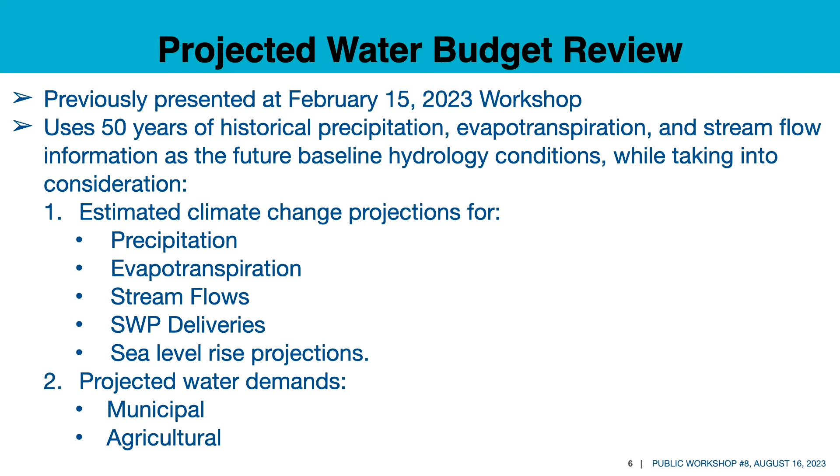The current water budget is essentially right now, so we picked a small subset of that historical budget to represent the current conditions. And then there's the 50-year planning horizon that starts from the date of adoption of the GSP, which is going to be January of 2024, and then going out 50 years through the end of 2073.

And so again, as I was describing, what we do to create this planning horizon is we take 50 years of historical data, and then we make adjustments, or perturb it in the nomenclature of DWR, to take into account the effects of climate change. So our baseline condition that we used for projecting 50 years into the future is the historical period of 1953 through 2002.

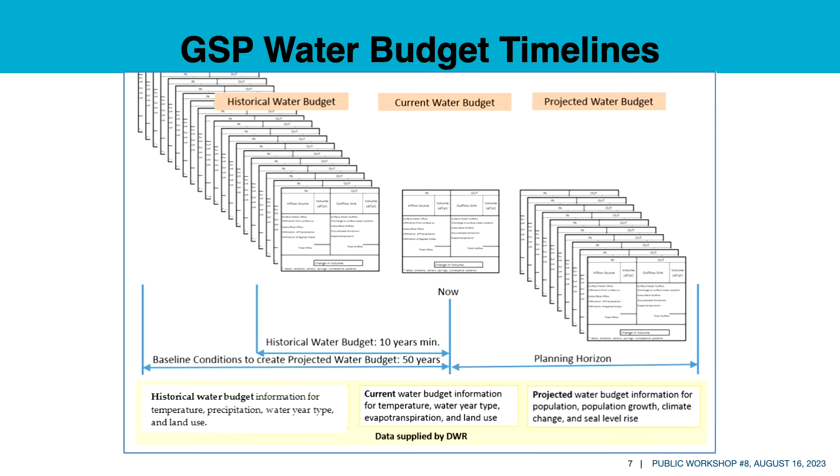So DWR has provided monthly climate change data sets, or what they call change factors, for these aspects of the water budget and the hydrology of the basin. So we have monthly change factors for that historical period. For precipitation, it's expected that as the climate warms, we'll actually see a little bit more precipitation in the basin than we saw historically.

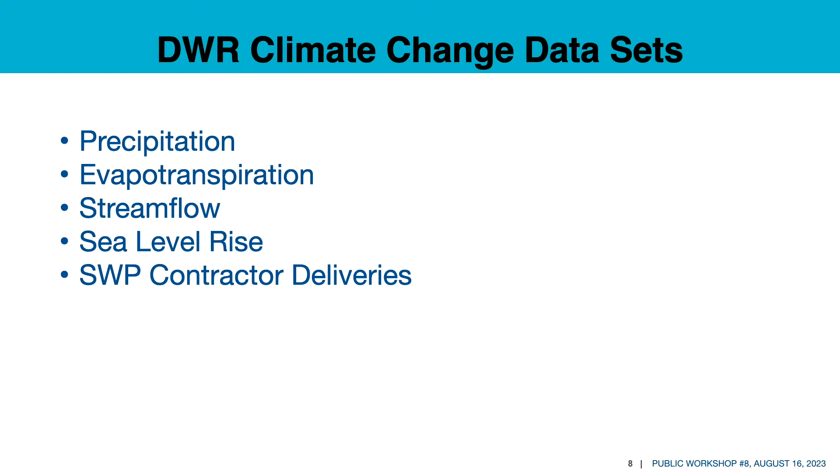And of course, as things heat up, we've got more evapotranspiration, both from native vegetation as well as crops in the basin. Stream flow, of course, if we've got precipitation increasing, we have a relatively commensurate increase in stream flow. Sea level rise, the predictions are about 6 inches of sea level rise between now and 2030, and about 18 inches between now and 2070. So we've incorporated the rising sea level in the groundwater model.

DWR also provides change factors for state water project deliveries, and that really is essentially inconsequential for this basin. It didn't make any change because you guys don't use a whole lot of state water project water anyway.

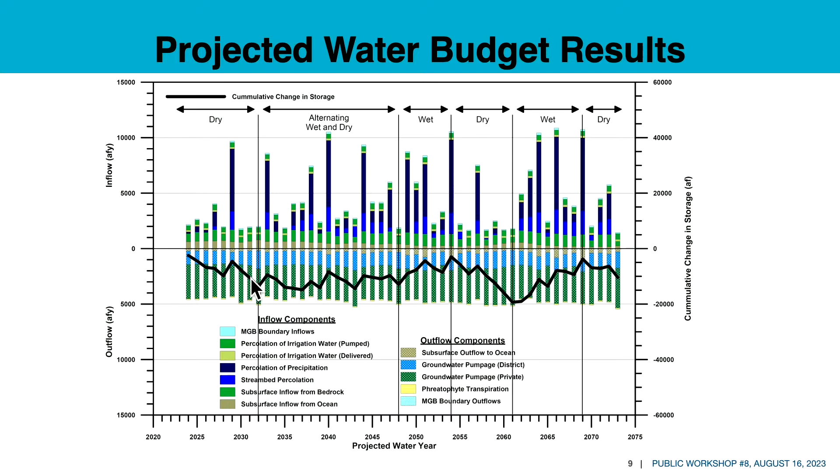So we used that projected water budget and we created a groundwater model scenario that incorporates it using the calibrated groundwater model that I discussed, I think it might have been back in November now. So we have a groundwater model of the basin. It was calibrated to the historical period of 1985 through 2020. And then we took that calibrated model and created this projected future scenario.

And we used that projected future scenario to run a variety of simulations of CAPP to see how we can operate CAPP in a way that's technically feasible, and I'll talk about what the criteria for technical feasibility are, and then to assess what the impacts of that eventual technically feasible project might be on the basin, assuming this projected future actually occurs.

So at the last meeting in May, Bob spent a fair amount of time talking about the CAPP project. He gave you a lot of details about the CAP project. So here I just want to hit some of the highlights of it. I'm not going to go over all of that stuff. But basically this is a recycled water project.

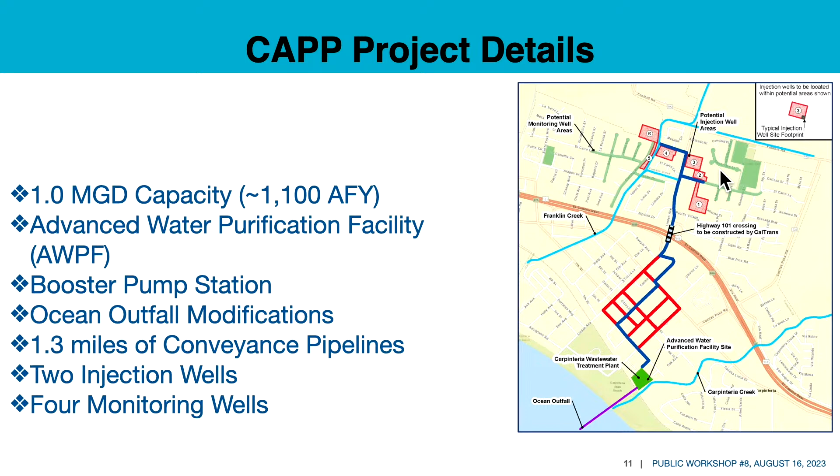And then there is a series of monitoring wells that are associated with that CAPP project that are required by the various regulators that have oversight responsibilities for a recycled water injection project.

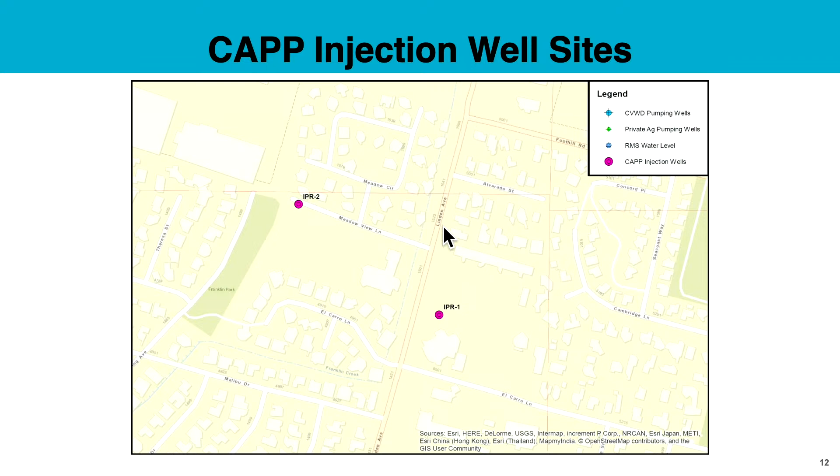And each well is injecting at a rate of about 350 gallons a minute, or a half MGD, so the 2 wells combined are injecting the 1 MGD output from the AWPF.

So as I mentioned, we've used the model in this scenario to evaluate a few different types of project operational scenarios, which I'll be discussing here in the next few slides. The first is a so-called injection-only scenario. The second is a simultaneous, quote-unquote, put-and-take scenario. And then the third is this water level management scenario. So I'm going to talk about each of those over the next few slides.

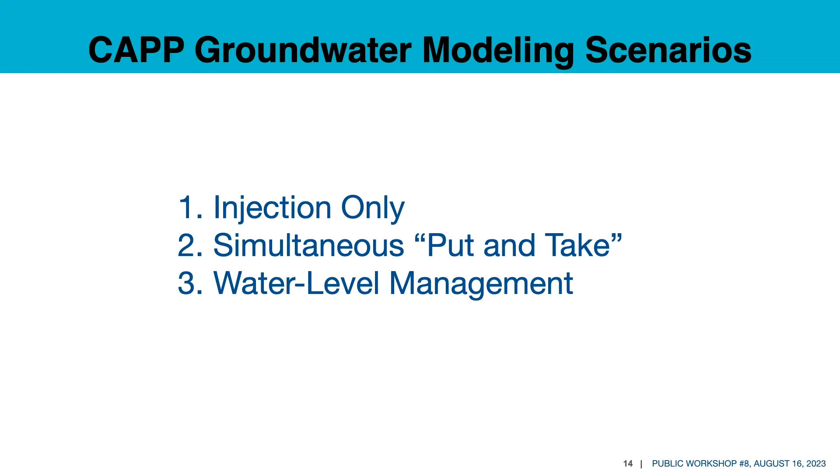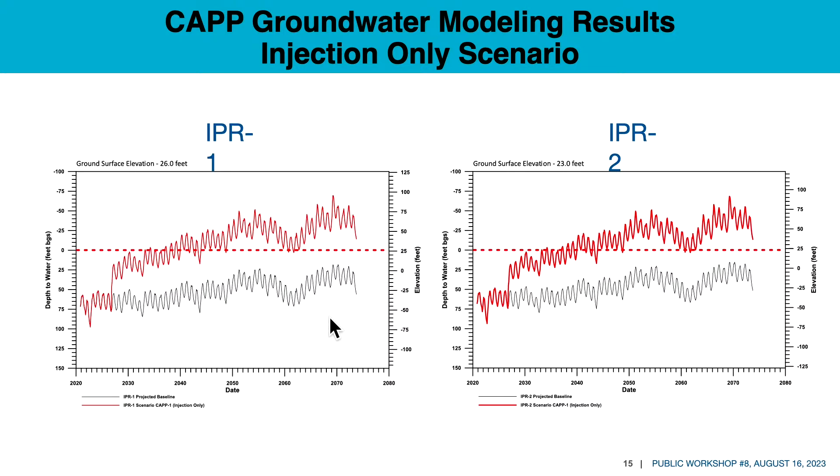We can't have water levels in the aquifer system at these injection well sites exceeding the ground surface for a variety of reasons, but the principal reasons are that there's the potential for groundwater basically daylighting at the ground surface, creating artesian conditions, which in addition to just creating a nuisance, wet water on the ground everywhere, also represents a significant potential for loss of water from the basin, right? If it's squirting out at the ground surface and running down the creeks or being evaporated, we're losing water.

So one of the principal technical feasibility criteria for this injection well project is maintaining water levels at these injection well sites at or below ground surface at all times.

So that took us to the next type of simulation, which we're calling simultaneous put and take. So in this scenario, we kept the injection rates at the same rates as the previous injection-only scenario, but then we increased the pumping of the district's headquarters and El Carro wells by a half MGD each. So we left their baseline pumping alone and we just pumped them harder. So basically, as we're injecting a combined 1 MGD at these two injection wells, we're pulling an extra 1 MGD out between the two districts' wells.

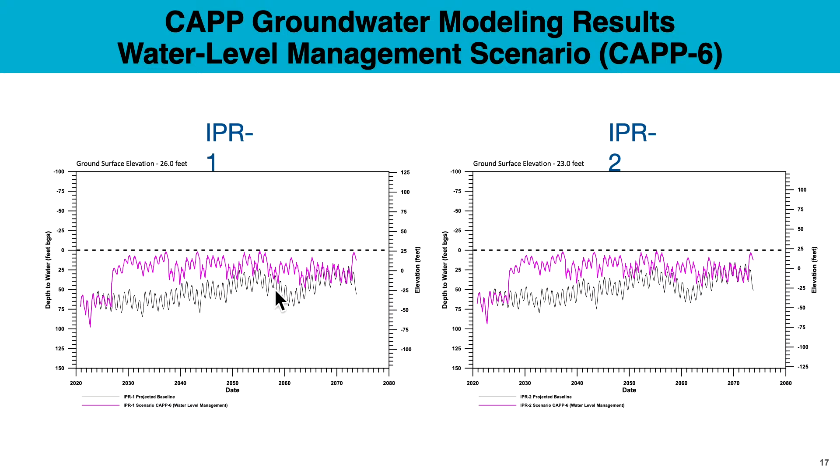Yeah. That's right. So this period here around the projected 2050s, early 2060s, where we see water levels going down, that corresponds to the historical period that we're assuming is going to happen again. So that's what this dip is, those hydrologic conditions that we saw in 1987 through 1990 or so.

Yes, sir. Does that consider that wells in the surrounding areas have been pumping a lot more now than they were back in the 50s and 60s? Yes. So for the 50-year projected scenario, the only data that we're using from the 50-year past is hydrology, precipitation, ET, stream flow, etc. The pumping that we used in this scenario is projected pumping by the district. So we used the district's urban water management plan, how much they plan on pumping the basin.

So the district's plans for pumping the basin in the future are very different than how they've pumped in the past. And we've used similar assumptions about projected agricultural pumping, which is essentially that ag pumping is not going to change much moving ahead, at least in the long-term average. We do have in this scenario a slight overall increase in agricultural pumping caused by the increase in evapotranspiration, which increases the demands of the plants, so you've got to pump a little more to overcome the soil moisture deficiencies that the extra ET creates.

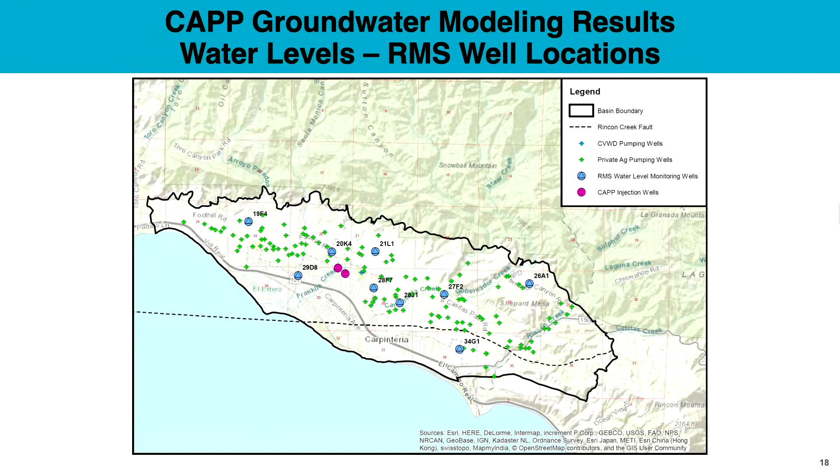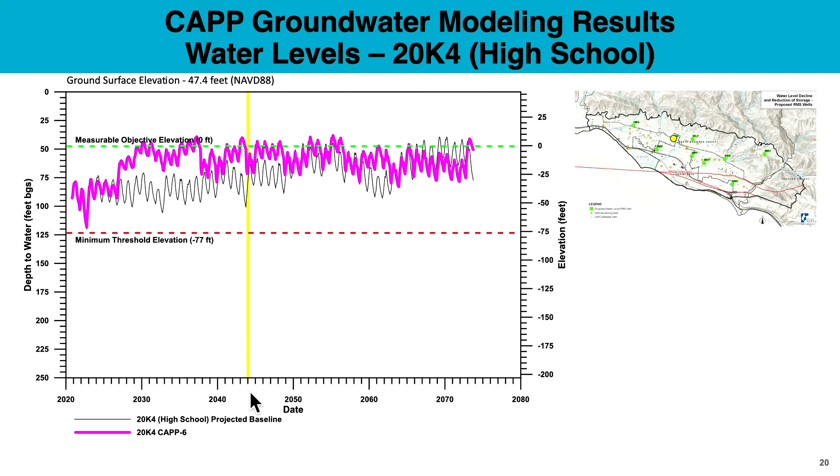So again, just moving around the basin here, a little further northeast of the high school well, 21L1, and we see a similar pattern here. Meeting the minimum thresholds, we see a water level benefit. We don't quite get to measurable objectives at this location.

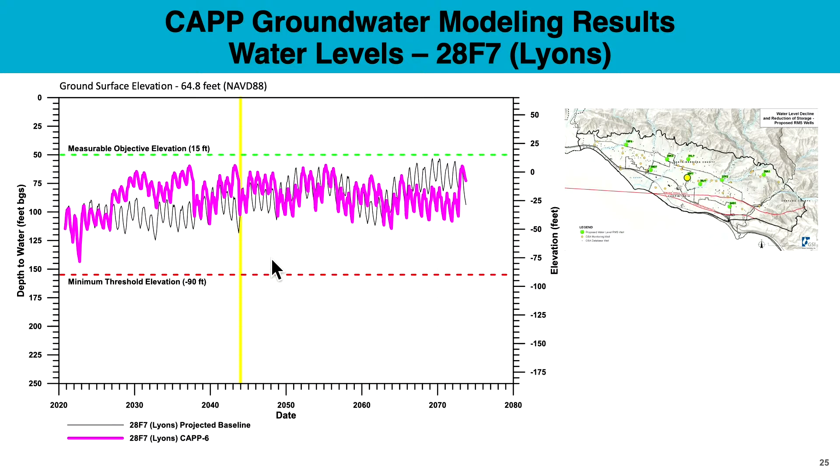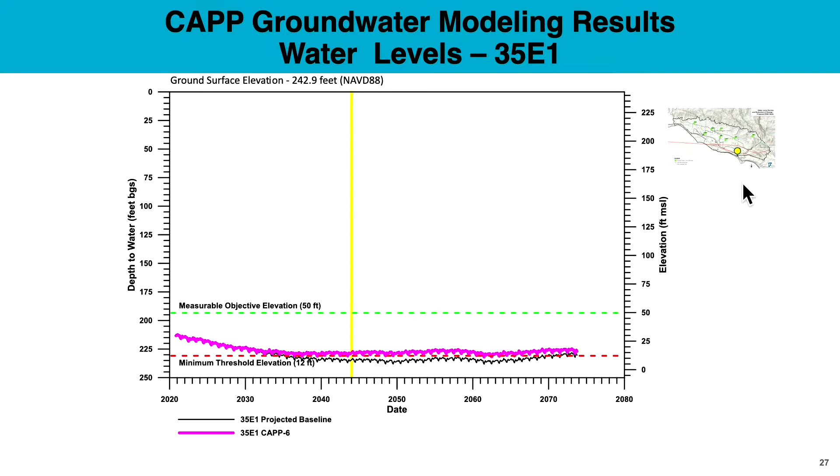These are all privately owned wells that we've got an agreement with the owner to monitor. Of these 9 RMS wells, or representative monitoring site wells, that I've shown you, the only one that's an active district pumping well was the headquarters well. All the others are existing agricultural wells that may or may not even be pumped.

So that's the water level impacts at the RMS wells that are in the GSP. We need to show that we're able to meet the minimum thresholds by 2044. But as we've talked about many times about this GSP, one of the main concerns in this basin is the potential for seawater intrusion. So now I'm going to talk a little bit about what the water level impacts at the coast are with and without the CAPP project.

Now, none of the hydrographs and the water levels that I'm going to show you have had minimum thresholds established for them, so we're not talking about hitting MTs at these next several wells, but it's incredibly relevant to what the implementation plan is going to look like, and where we're going to go from here with this GSP.

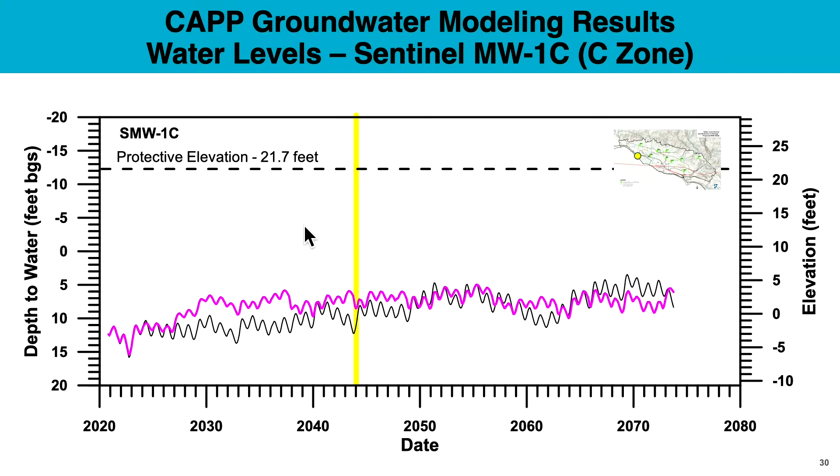And this is the C zone, similar story to the B zone. The CAPP project does provide some benefits. It does slow the rate of seawater intrusion, which I'll talk about more in a moment. But because this well is around 900 to 1,000 feet deep, we've got to get water levels pretty high, almost 22 feet elevation. Again, we've got a ways to go at this location. Now I'm going to look at water levels at the coast in a slightly different manner.

The next 3 slides. Hey Robert, before you move on. Yes, sir. I just want to make it clear that these protective elevations are based on an approach and some assumptions about the geology between the ocean and the basin, and we plan to continue to study it to refine that. We basically had to come up with a number, took a basic approach, made some assumptions. You might ask yourself, on the C zone that's about 12 feet above the ground surface at the sentinel well.

So does that mean essentially water is bubbling out of the well? And certainly if you got this level, that's what would be happening. You have to pressurize those casings. And so again, we're looking at it very broadly at this point. And when we get into the management actions, we'll talk a little bit about some of the steps we'll take in between getting those water levels to those elevations, just to verify that our assumptions are correct.

Yeah, there are a lot of uncertainties associated with the relationship of the basin and the ocean, in particular in this deeper zone. There's just not a whole lot of information about what the hydraulic conductivity of the sands in those zones are, a variety of other things. So Dave will talk when I'm done here. He'll talk a little bit about the types of studies and things that are going to be put into the implementation plan for the GSP to get at this issue.

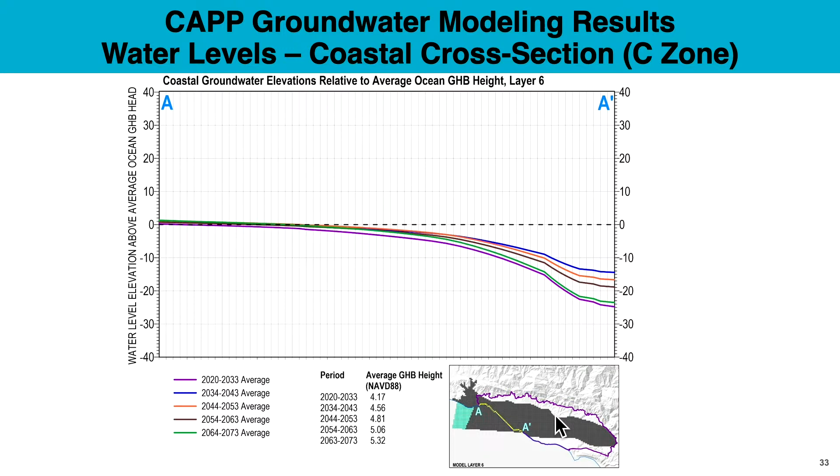So a lot of work is going to need to happen to get a better handle on understanding exactly what's going on in this area of the basin, and then also developing a plan to do something about it. So that's it for the water level impacts.

Now I'm going to move to the water budget impacts. So how does CAPP affect the accounting of inflows minus outflows, change in storage? So this is the same graphic I showed you 20 minutes ago, 30 minutes ago at the beginning for the no project scenario. It's the exact same graphic, just with the CAP project added to it.

So on the inflow side, in purple here, sort of pushing all these bars up by the same amount, 1,100 acre-feet a year of injection. And then recovery on the bottom part of the graphic here. And then again, the black line is the cumulative change in storage, or the difference between inflows and outflows each year, cumulatively, year to year to year.

And not unlike the no project scenario, this cumulative change in storage curve is relatively flat, but we do see at the end of the 50-year run a relatively modest deficit of about 10,000 acre-feet.

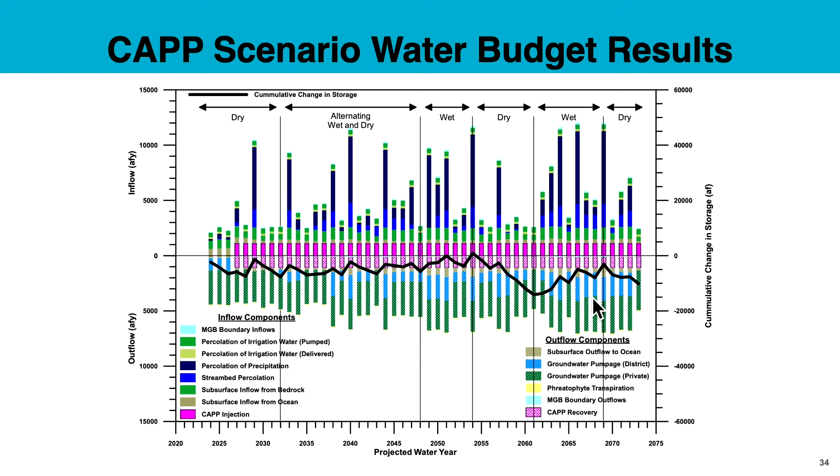So here's a table that puts numbers to what I was showing you graphically. And what this table is, it's a comparison of the no project baseline and the CAPP Scenario 6 project, summarizing the average annual volumes over that 50-year period for each component

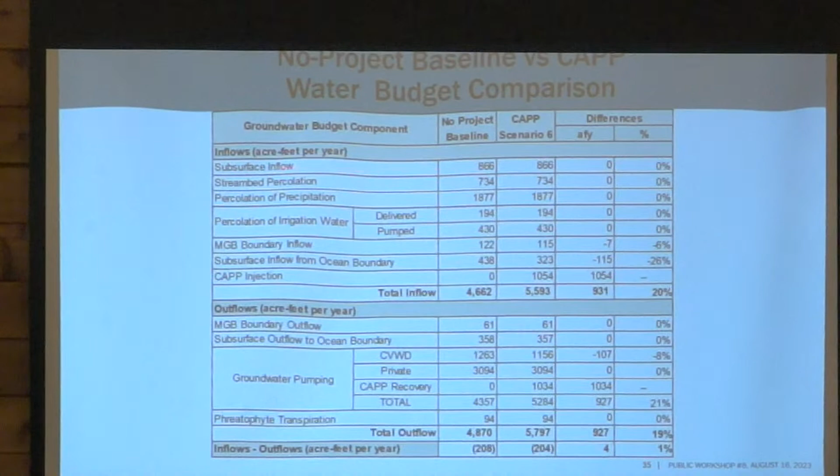of the water budget. So we have inflows, we have subsurface inflow, stream bed percolation, percolation of precipitation, percolation of irrigation water, inflow from the Montecito basin across the boundary, and I'm going to come back to this, subsurface inflow across the boundary. So this is the model simulated amount of water that's coming from the ocean side of the boundary into the basin. And then on the outflow side, we have relatively minor boundary flows. By far the largest source of outflow in the basin is pumping.

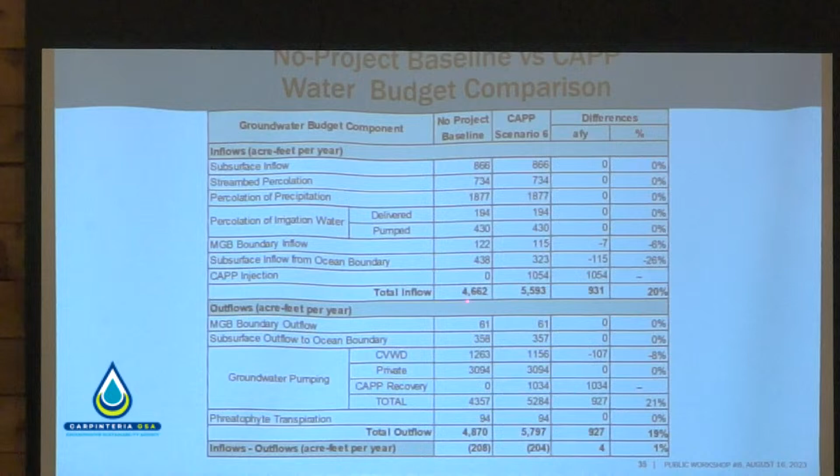So starting with the no project baseline, over that 50-year period, we have an average annual amount of inflow of about 4,700 acre-feet a year, roughly. I'll call it 4,670 for this discussion. And then an outflow of 4,870 acre-feet a year, which results in a slight deficit, or slightly more outflow than inflow, of about 200 acre-feet a year on average.

So going back to what I said on the previous slide, at the end of that 50-year period, we have a cumulative deficit of 10,000 acre-feet. 200 times 50 years, that's how you get the 10,000. Now with the CAP project, same components. There aren't many differences in percolation of precipitation, subsurface inflow, those parts of the inflow, which you would expect, right? I mean, the CAP project's not going to have an effect on rainfall or precipitation.

I'll come back to subsurface inflow from the ocean boundary here in a moment, but basically we've added to the inflow side of the equation the CAPP injection. Now over that 50-year period, it averages out to about 1,050 acre-feet a year. You've heard me and Bob talking about 1,100 acre-feet a year, and you might ask, well, why isn't it 1,100? It's because the project's not going to start until 2027, but the 50-year period starts in 2024. So over that 50-year period, there are a couple, 3 years there where CAP's not running. So that's why that average number is what it is.

So with the CAP project, we now have a total amount of inflow of about 5,600 acre-feet a year. A little bit of a difference in district pumping because, as I was describing earlier, we were able to back off a little bit on the district pumping of native groundwater. So we have a little bit less pumping of native groundwater by the district under the CAP scenario. And then we're basically recovering all of the CAP water.

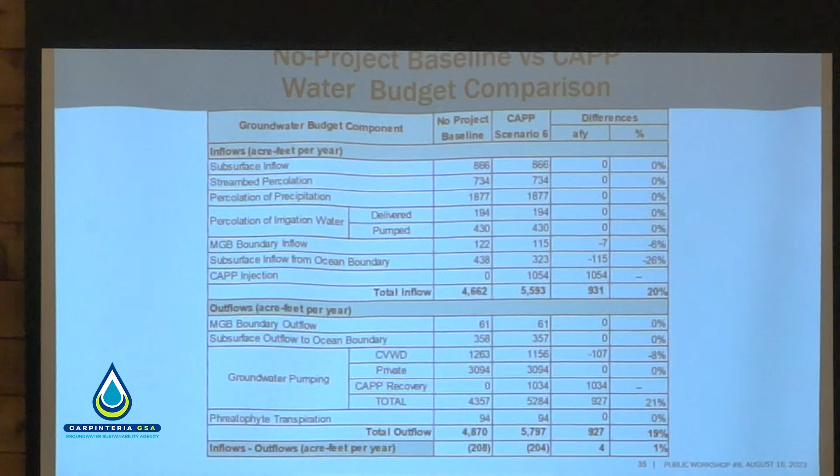So without the CAPP project, we've got about 440 acre-feet a year coming in from the ocean boundary. We're dropping that down to about 320, 325 or so. And then again, the other benefit of the CAPP project is this reduction in the native groundwater pumping by the district.

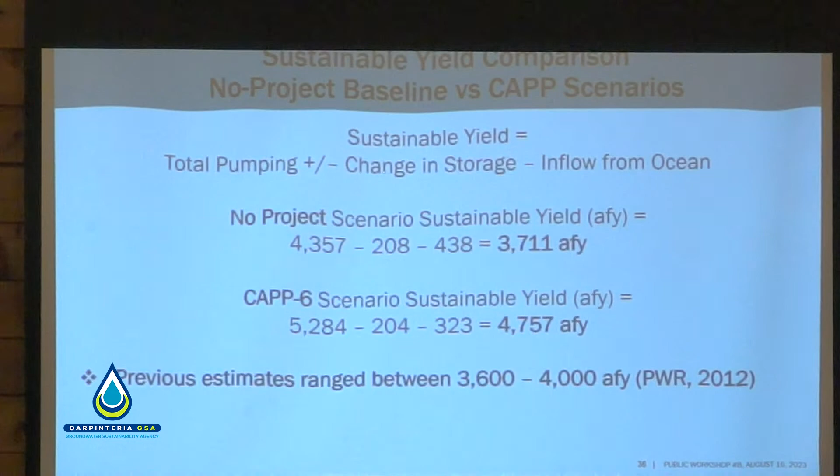So moving on, what does all this mean for sustainable yield in the basin, right? What is the sustainable yield of the basin with or without the project? A common misconception about sustainable yield, or it used to be called safe yield of a groundwater basin, is that the safe yield or sustainable yield is equal to the amount of recharge. Right? I mean, that kind of makes intuitive sense. If we've got 4,600 acre-feet a year recharge, that's the sustainable yield.

But it's not, because the ability to effectively capture all of that recharge without any adverse impacts is virtually impossible. So the sustainable yield of any given groundwater basin from a practical standpoint is always going to be something less than the amount of recharge. And this is particularly relevant in the context of SGMA and meeting the sustainable management criteria, or the SMCs.

So the way that sustainable yield is really calculated is that it's the total amount of pumping plus or minus the change in storage, and then in a coastal basin, we need to subtract out the inflow from the ocean boundary, because even though on the water budget side, we have water coming into the basin and it's contributing to the inflow of the overall water budget equation, that doesn't represent usable water. So we can't count inflow from the ocean in the water budget as part of the sustainable yield.

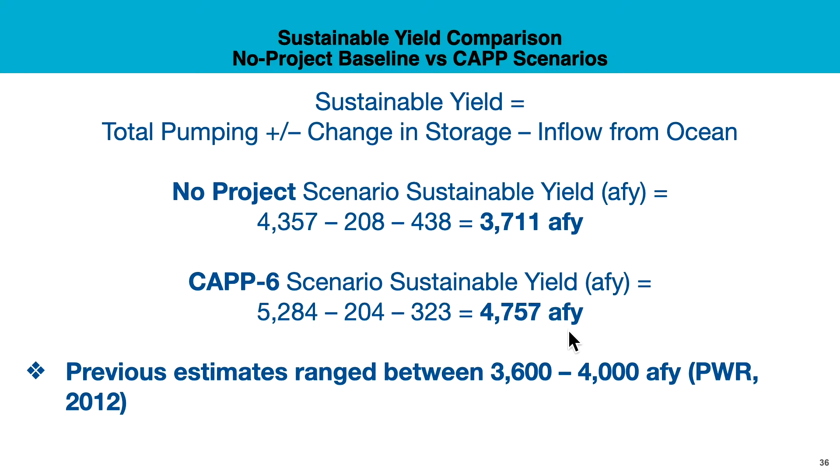So we're talking about the sustainable yield of the groundwater basin itself. This number, the 3,700 acre-feet a year number or the 4,700 acre-feet a year number, that is part of the district's overall portfolio. So I think maybe what you're asking is, do these numbers include the yield of the Cachuma project? You talked about sustainable inflow.

You talked about inflow, right? Mm-hmm. To the groundwater basin. Right. So if there's inflow from Lake Cachuma, is that considered the same formula as inflow from, is that what you're assuming both? Their inflow? Well, to the extent that imported Cachuma water adds to or affects the groundwater basin, it is really only in the agricultural return flows associated with the district's deliveries of Cachuma water to agriculture. Otherwise, the municipal demands, they bring it in through the South Coast Conduit and it goes directly to homes. That water from the Cachuma project never even sees the groundwater basin. No.

Now, one of the potential projects and management actions moving forward that Dave is going to be talking about in a few minutes is a concept called aquifer storage and recovery that has been studied in the basin for the water district over the past decade or so. And should that project or a variation of it be implemented, one of the potential sources for that aquifer storage and recovery project would be Cachuma water.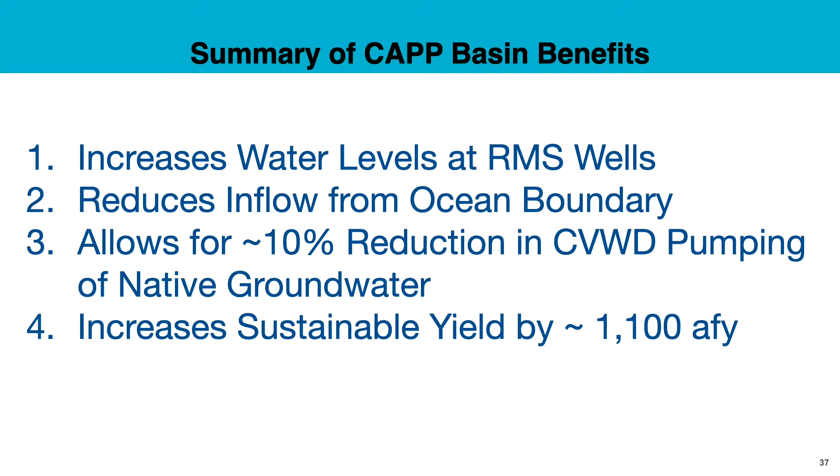Any additional questions? So the lake water goes to just ag? No, sir. The district provides Cachuma water to all of its customers, which includes both ag and municipal. I don't know offhand what the relative proportion is. About 50-50. Yeah, it's about 50-50. 50% of the water that we serve to customers goes to ag, and 50% goes to what we call M&I, which is municipal and industrial use. But it's not like certain customers get lake water and certain customers get... From a molecule standpoint, that would be very difficult to define. Okay. But I wanted to come back to an earlier question.

So other than artificial aquifer storage and retrieval projects, where we actually purposely build a well and inject the imported water into the groundwater basin, there's only one mechanism for that water to make it into the groundwater basin. Cachuma water is delivered to agricultural users and to some degree non-agricultural. That water is applied to crops and irrigation.

So first things first, we're calling out a specific project for the Sentinel well expansion. Like Robert mentioned earlier, they put in that cluster of 3 wells, each one with a discrete well screen interval at increasing depths in the A, B, and C zone. And when they first put them in in 2019, none of the 3 had significant amounts of chloride. Since 2020, the C zone in particular has been increasing. The B zone, it's been sort of up and down.

But the point is, compared to some of these other coastal basins, Oxnard, Salinas, Mound, where they've had demonstrated seawater intrusion for decades, here we've got a single point in space where we've seen it, and it's only in the last couple of years. So after the CAPP project, the next one that's going to be prioritized is likely to be this Sentinel well expansion.

So we want to put in, at least initially, a couple of wells along the coast to better characterize the hydrogeology in that area. Some between the Sentinel wells and the headquarters well, and some from the Sentinel well up to the northwest toward Montecito. So we're presenting that as its own project. Previously, we said we'll put this in with the seawater barrier project. But first things first, we need to get some better data. So after that, we'll be talking about a seawater intrusion barrier project. The scope and design of that project will be largely dependent on the data that we collect during the Sentinel well expansion.

It's been studied in this basin a couple of times. Like I said, originally the headquarters well was designed to be able to be used as an aquifer storage and recovery well. It's not going to be used as that right now. Right now it's earmarked for the CAPP project. But there's been a couple modeling studies. They did some field work 10 or 12 years ago. So it's been studied. It's not a new idea.

Regional water banking agreements, this is what Bob was mentioning. These are early conversations with Casitas and Montecito about possibly, with the interties, if they want to come drop some of their water here so they don't lose it. We've got available storage space where it could go. And usually those things work where they need to leave something back when we pump it back to them. We're early in that, but it is getting discussed.

Recharge enhancement, this would be either stormwater recharge basins, or it's been brought up that Franklin and Santa Monica Creeks got lined back in the 70s to mitigate flood risk. And these days, they're tearing down dams, so it's not crazy talk to talk about taking those linings out so that when those creeks are flowing, they can recharge the aquifer. There's potential issues that need to be sorted out with the flood control district, but that's another potential project.

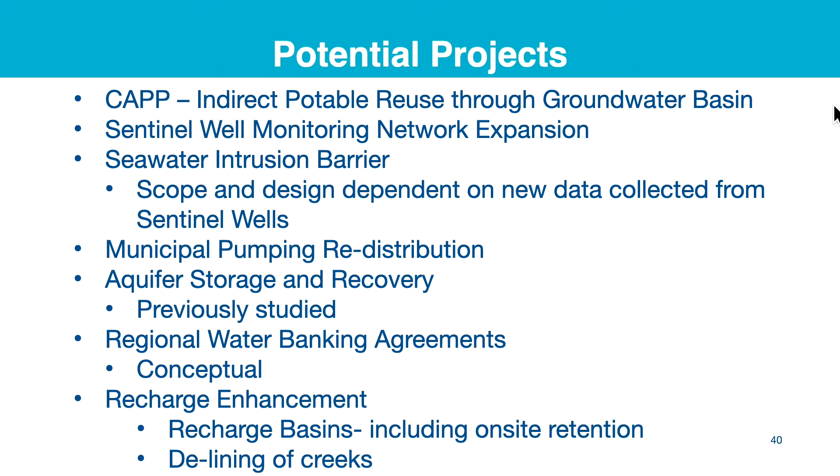So we'll be at least discussing all of these in the text of the GSP, and I'm going to go through the first few in more detail than the second few, but let's get into it. So the Sentinel well network expansion, other than the CAPP project, which is definitely a go, this is the next one that's likely to be a definite go.

I wish this light was working, but... It's at the very top. It's like, yeah, this one, right? It's a little red line. Yeah. Oh. Okay. Maybe I just wasn't pushing hard enough.

So the Sentinel wells are right here, okay? The district headquarters well is here. This is a water level map from 2020. So you've got this surface depression in the center of the basin that's driving this whole discussion about seawater intrusion. So the groundwater flow direction is basically from west to east toward this depression, at least in 2020. It varies by year with hydrology.

So the idea is to install another couple of Sentinel well clusters, but probably to prioritize this area between the current Sentinel wells and the headquarters well, because that's the closest district well. And then second phase might be running a couple up here on the way to Montecito.

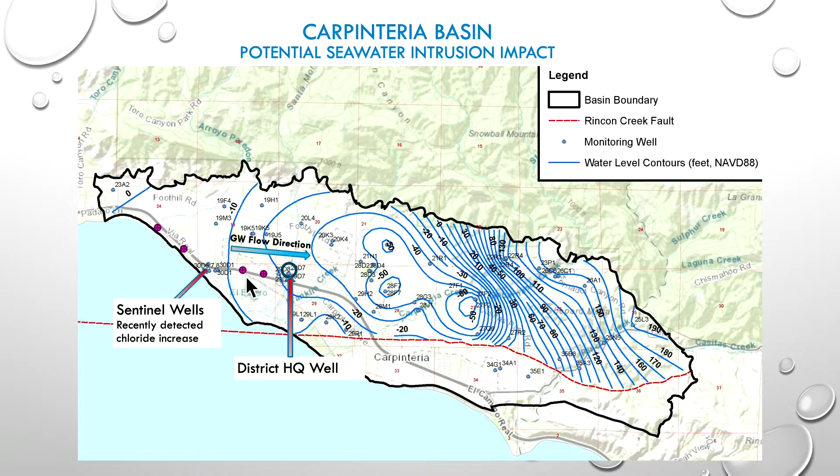Groundwater moves at a very slow velocity. It's dependent on the gradient, like this one. These are 10-foot contours. So between the Sentinel wells and the headquarters wells, a difference of about 15 feet. So just wanted to make that point about groundwater velocity. And it's unlikely that taking the 5 years to get this good data is going to have a negative impact on conditions in the basin.

On costs and scheduling, right now they're installing a well cluster in El Carro Park. So we have a really good idea of what that cost is. It's about $750,000 for a cluster of 3 wells. Another 150 or so for design, engineering, permitting, non-drilling costs. The 750 is like drilling costs, and then 150 for engineering and other support. So about $900,000 per cluster of 3 wells.

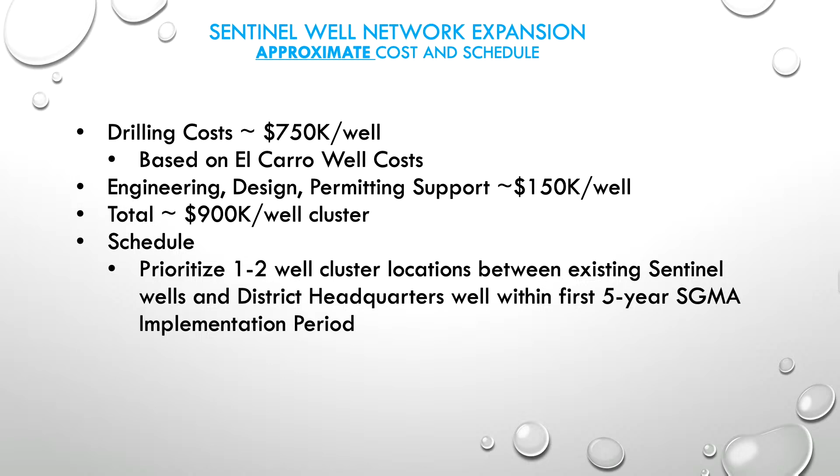Like I said, it would probably be prudent to prioritize 1 or 2 in the area between the current Sentinel wells and the headquarters well. Get those in first, get that data first, and then drop back and maybe go up the coast toward Montecito in a second phase. So we're talking about putting in at least 1 or 2 toward the headquarters well within the first 5-year SGMA implementation period.

Okay, now we'll talk just conceptually about the seawater barrier project. Scott, this is that cartoon that I was kind of talking about. So under non-pumping conditions, this dashed level is basically water level surface. Here's the ocean, here's fresh groundwater in a confined aquifer. This is water flowing from the ocean into the aquifer. So under non-pumping conditions, you got this sort of bubble of fresh water sitting on top of a wedge of potential ocean water coming in. Again, seawater is denser, so it sinks. You're going to find it at higher concentrations in deeper strata.

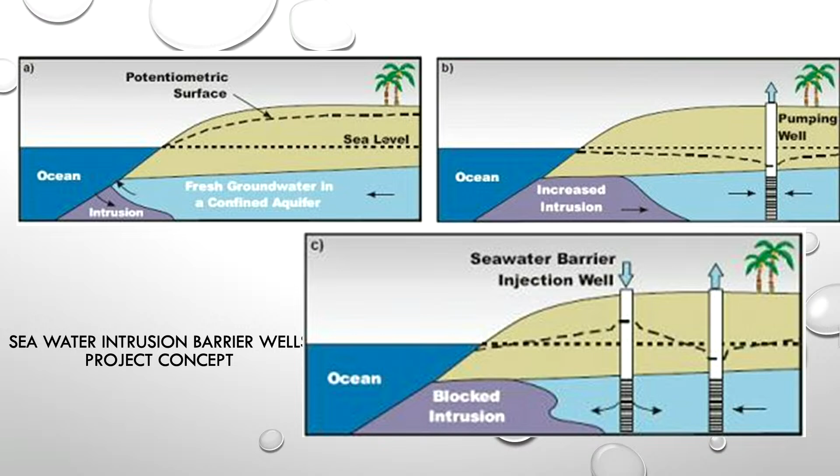And you come along here, you put in a pumping well, you're decreasing your water levels, so you increase the possibility for seawater intrusion. And the simple concept of a barrier well is to put in a well between your pumping well and the ocean, and that keeps the intrusion at bay. This isn't a new idea. They've been doing it down in Orange County and LA for a number of years. They're doing it up in Salinas right now. It's not simple, but it's a well-proven engineering concept, and it's the next most likely project once we do the Sentinel well expansion.

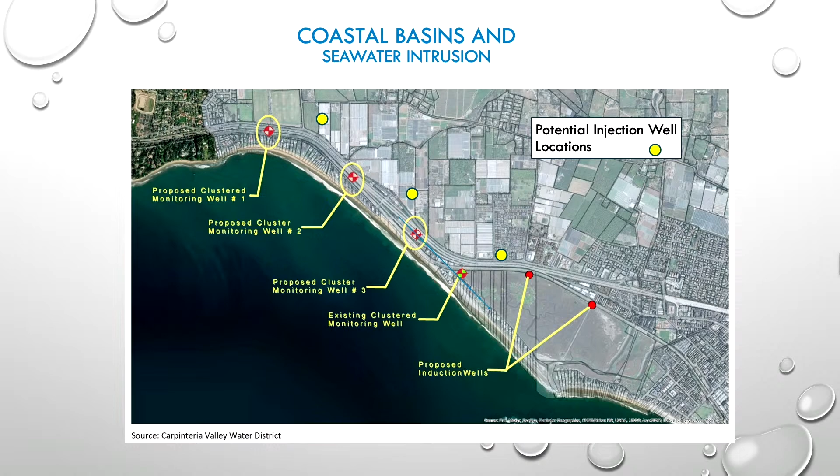You know, do we need 3? Do we need 8? Don't know. That's why we need to do the Sentinel well network expansion first to get that data. So we're not going to present any potential project costs or anything like this because, you know, we just need to get that data first.

So the sequencing of a seawater barrier project would be, first things first, I'll say it one more time, we've got to do the Sentinel well expansion first, okay? We do not have adequate data to even do conceptual design, figure out how many wells we might need or the cost. It's just, we're not there yet. Once we do have that data, we'll be able to update the model with the specific aquifer transmissivities that we get from the new wells, porosity, et cetera.

And after that, we can start doing some runs, see, well, 3 wells ought to do it, or no, we're going to need 12 wells. I mean, really can't tell right now. I don't think it's going to be 12, but they're not going to be cheap wells. It's not going to be a cheap project, so we just want to get the data.

So after we do the modeling, there will be engineering analysis, feasibility, cost estimate, et cetera, and then some pilot testing. So here I have kept Sentinel well expansion as part of the barrier project sequencing, but we're presenting it as its own project in the text of the plan.

This is, I mentioned earlier, municipal pumping distribution. So right now, the 3 wells that the district pumps are this one, Headquarters Well, El Caro Well, and Smillies Well. These other ones, Lyons and High School, are not currently used. Sentinel wells are over here, so there's concern about seawater intrusion here. So ultimately, in long-term planning, there could be conversion of the Headquarters well to an ASR well. It's not that old a well. It was put in about 20 years ago. It's all stainless steel. It should have plenty of life left.

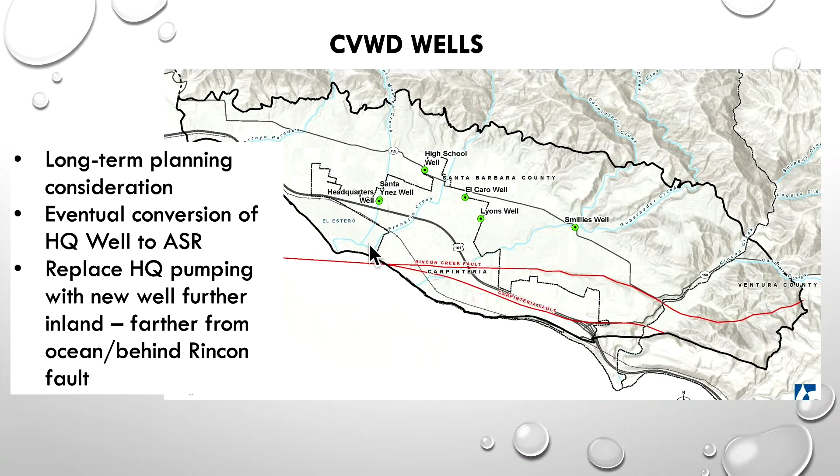Okay, I'm just going to talk very briefly about aquifer storage and recovery. Again, it's not a really new concept. It has been studied here in the basin a couple of different times over the last 15 years. When I started in this business in the 90s, I thought it was a pretty new thing and pretty hip, and it's gotten a lot more accepted in the past couple of decades. It's practiced nationwide now, and it's a well-tested technology.

So the idea is in times of plenty, you store water in the aquifer just like you would store it in a reservoir. You need to construct a well that can handle two-way flow. You can inject and pump out. It can be operated at various time scales. Some people do it daily, but it can be done seasonally, where you inject in the winter and pull it out in the summer, or on a longer-term drought cycle, where you inject when you've got a couple of wet years in a row and then pull it out during the drought.

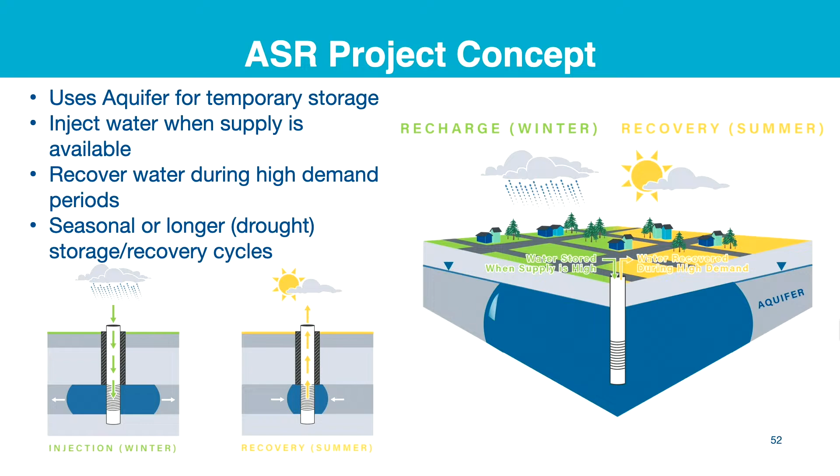So as you inject it, you get this bubble, for lack of a better term, as it starts moving out from the well. This picture makes it seem like there's a really sharp interface between the injected water and the native water, and that's not the case. There's always a mixing zone. So at some point when you start pulling it back out, it'll look less like pure injected water and start having some of the water quality of the native water.

So there's a lot of technical details involved. Like I said, it's been studied here before. We're going to include it as a potential future project in the plan, especially with the headquarters well convertible to an ASR well. But I don't think we'll be presenting detailed costs or number of wells or anything like that.

Recharge enhancement, I mentioned it just very briefly. There's inflow, there's outflow. The inflow on the recharge part is either stream percolation or percolation of rainfall. So if you've got a water source and you've got land, you can build a stormwater capture basin to capture that water and let it percolate naturally. It takes land and a water source, but people do it all the time. So it's a potential project that would increase the recharge side of the equation.

The other one mentioned is de-lining the creeks. Santa Monica and Franklin Creeks were lined to move that water through a lot faster. It's been proposed that maybe we could take that out. It would allow more percolation of stream water when the creeks are flowing. Some preliminary modeling done about 10 years ago indicated about 200 acre-feet a year of recharge could be realized with a project like this.

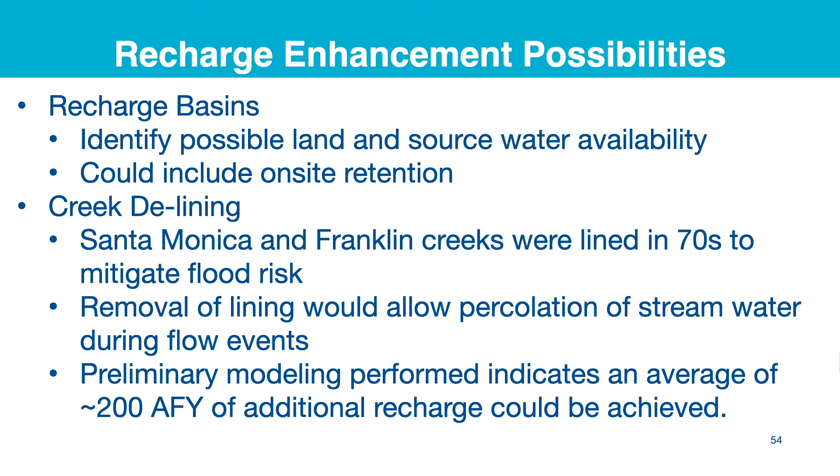That was a modeling study, not an engineering analysis where they looked at cost benefit. You flood a $1 million house and it might make that whole project look a lot different. So it's not to say it can't be done. It needs to be studied. As I will talk about in the implementation plan, there will be some sort of ranking study of all these different projects to look at cost benefit and see what gives you more bang for the buck.

Bob mentioned the intertie with Casitas, and there are also very preliminary discussions with Montecito about possibly, if they need a place to put some water and don't want to lose it, they could conceivably bring it over here. We could put it in an ASR well or a basin and percolate it into the aquifer, and then they leave behind whatever the negotiated percentage is when they make a call for that water later on.

Very preliminary conversations at this point, but we want to put everything that could happen, we're going to include in the plan, because it has to be in the plan to be available for funding in the future.

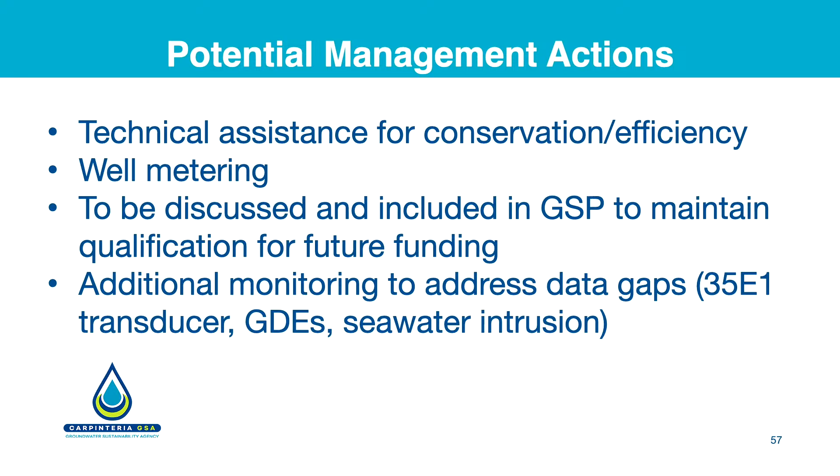Again, we'll include, let's see, the Sentinel well expansion, we're calling that more of a project now, not a management action. But these are the ones that will be included. Again, it's like the projects. If you don't include them, you can't go asking DWR for money down the line. So everything that's in the toolbox is going to be included.

The short-term and long-term implementation plan is what I'm going to discuss now, and this will be the final chapter in our GSP that will include a ranking study of all the projects that I just talked about. The next 5 years will include and presumably see the complete implementation of the CAPP project. The Sentinel network expansion, that's targeted for the next 5 years, so that'll be included. Metering study, more than likely. It's not clear yet how the ongoing GSA funding is going to be accomplished. Those things need to be included.

I just mentioned the potential groundwater dependent ecosystems, some data gaps like the 35E1 well, and then there's annual reports that have to be submitted every year. So that's part of the implementation plan. And in every one of those annual reports, the last section has to be progress towards sustainability. So DWR wants to see that you're making progress.

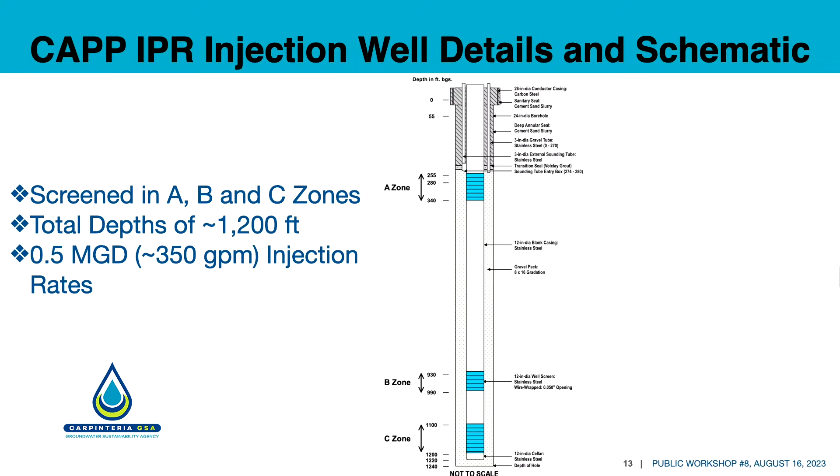Yeah, each one of these producing zones, these coarse-grained zones that have been mapped and designated as the A, B, and C zones, are relatively thin compared to the overall thickness of the basin. We're talking 100, 150 feet thick at most. For that reminder, I was thinking of A zone over here, B zone over here, C zone over here. Yeah, but it's vertical. Yeah.

The areal or map view segregation of the basin is the confined area in the center of the basin, where we have these clay layers vertically that confine those zones. Then we have the recharge area, which is basically everything outside the confined area. And then the Rincon Creek Fault, which separates the basin into two different storage units, north and south of the fault. Those are really the only lateral segregations in the basin. The A, B, and C is just talking about the vertical distinctions of these zones within the confined area only.

In the recharge area, these zones no longer can be correlated between wells, and they start to break down. And the recharge area is conceptualized, both in the hydrogeologic conceptual model but also in the numerical model or the groundwater model, as what we refer to as an undifferentiated stack of sediments. So depending on where you are, you'll have a different sequence of sand, silt, gravel, clay. You won't necessarily have this nice